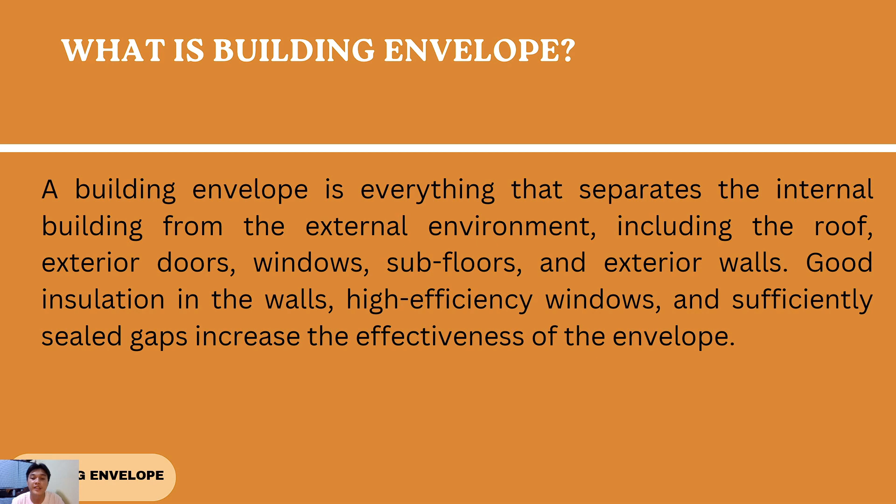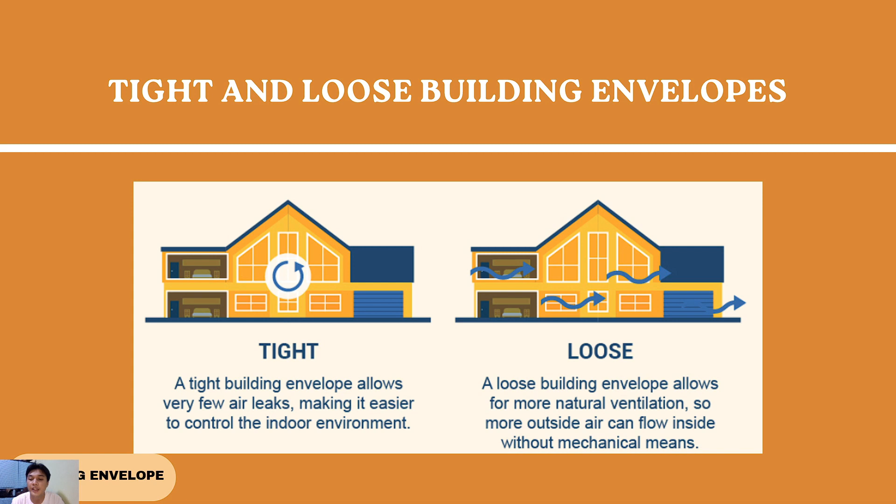Tight and loose building envelopes. So the first one is a tight building envelope. A tight building envelope allows very few air leaks, making it easier to control the indoor environment. A loose building envelope allows for more natural ventilation, so more outside air can flow inside without mechanical means.

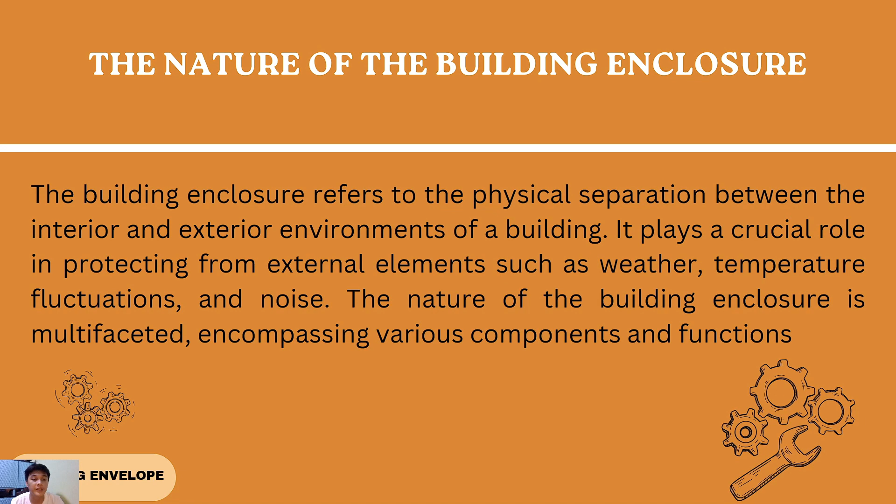The nature of building enclosure. The building enclosure refers to the physical separation between the interior and exterior environment of a building. It plays a crucial role in protecting from external elements such as weather, temperature fluctuation, and noise. The nature of the building enclosure is multifaceted, encompassing various components and functions.

A building in general consists of a collection of spaces bounded by a set of spatial separators. There are separators between interior environments as well as separators of the interior environment and the exterior environment. Collectively, the latter constitute the building enclosure. In many respects, the functions of the separators of internal environments within a building, floors and interior walls, are very similar to those of the building enclosure. Usually, however, the performance requirements of internal separators are fewer and much less onerous.

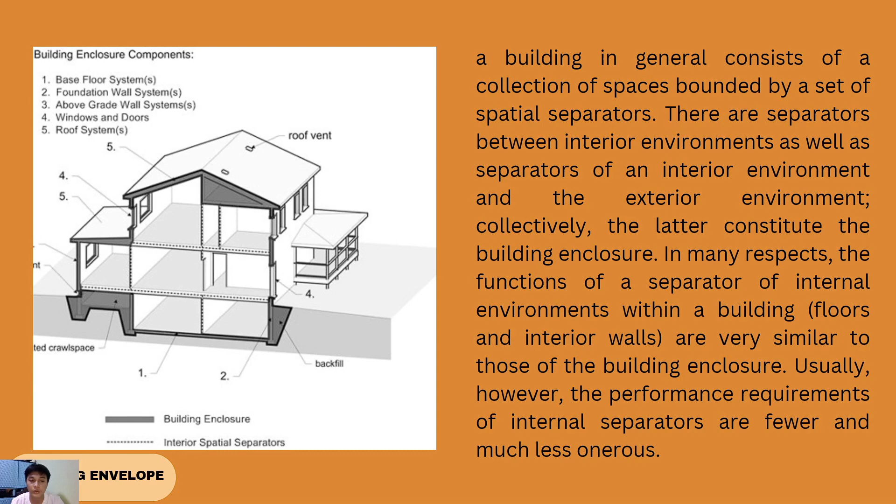Enclosure components. The building enclosure comprises various components that work together to create a barrier between the interior and exterior environments of the structure. These components typically include exterior cladding, structural frame, insulation, vapor barrier, air barrier, water barrier, roofing system, windows, doors, etc.

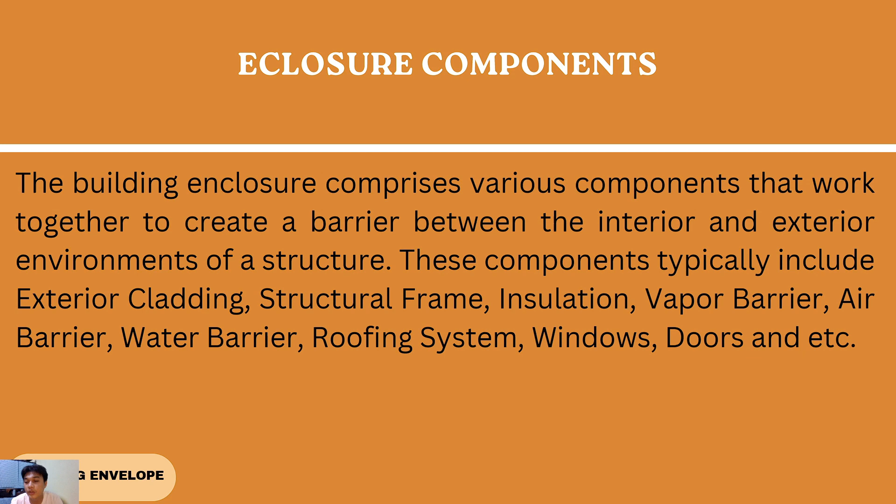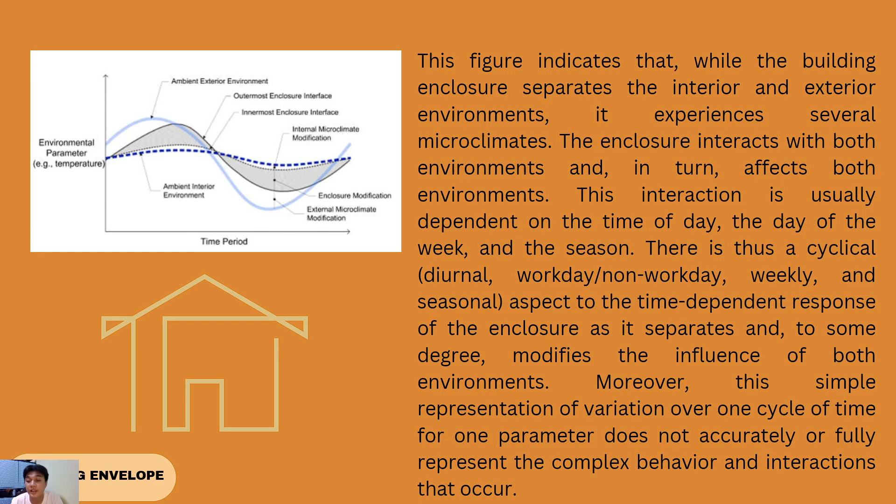There is thus a cyclical, diurnal, workday, non-workday, weekly, and seasonal aspect to the time-dependent response of the enclosure as it separates and to some degree modifies the influence of both environments. Moreover, this simple representation of variation over one cycle of time for one parameter does not accurately or fully represent the complex behavior and interaction that occur.

Enclosure loadings. The performance of any portion of the enclosure should be considered with regard to the various loadings generated by number 1, the exterior environment, number 2, the interior environment, and number 3, the enclosure itself. The generic term loading refers to any event, phenomenon, or characteristic that can affect the enclosure.

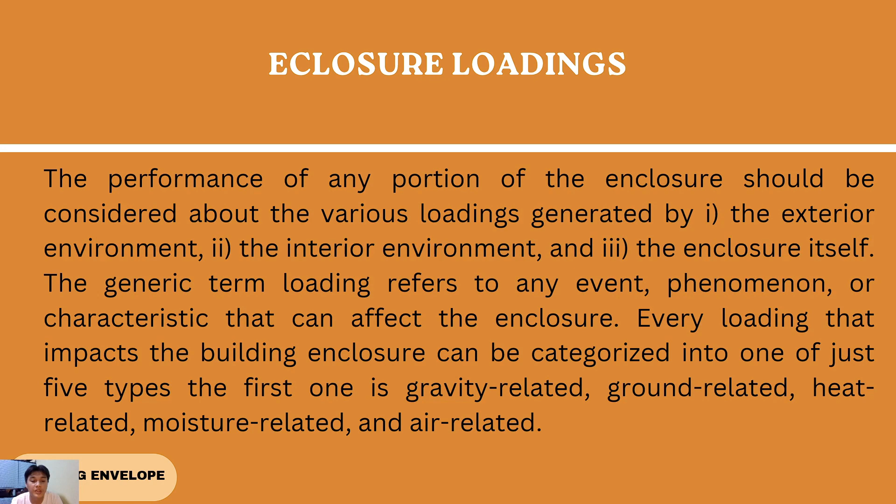Every loading that impacts the building enclosure can be categorized into one of just 5 types: gravity related, ground related, heat related, moisture related, and air related. Exterior environment loadings. The exterior environment described above is responsible for many different loadings. Sources of these loadings are the climate, weather over the short term, human or human-made effects, and nature or natural phenomena.

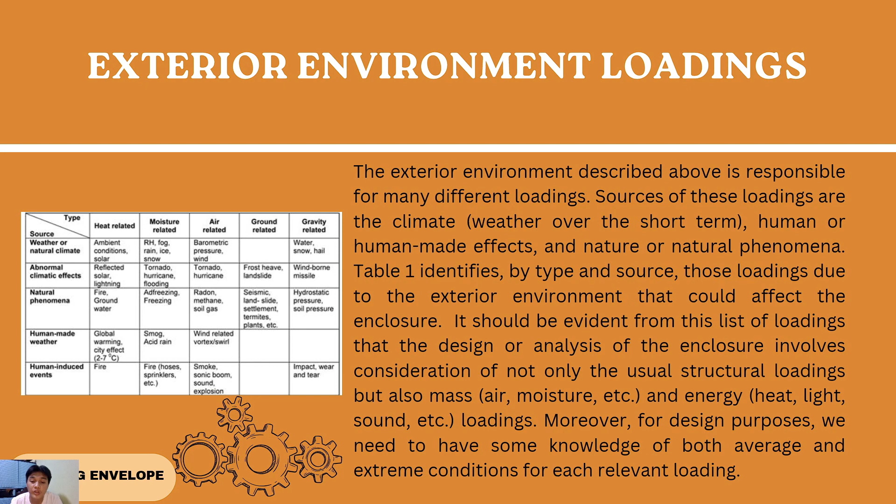Table 1 identifies by type and source those loadings due to the external environment that could affect the enclosure. It should be evident from this list of loadings that the design or analysis of the enclosure involves consideration of not only the usual structural loadings but also mass (air, moisture, etc.) and energy (heat, light, sound, etc.) loadings. Moreover, for design purposes, we need to have some knowledge of both average and extreme conditions for each relevant loading.

Interior environment loadings. The interior environment consists of occupied and often conditioned spaces. As shown in the table, the main sources of loading are human induced, the result of natural phenomena, or due to the conditioning. Variations in the state of the interior climate and the related extreme values tend to be smaller than those occurring within either the enclosure or the exterior.

This occurs not only because the building enclosure modifies the effect of exterior variations, but also because the interior environment is generally augmented by inputs of mass and energy. The building or parts of it may be mechanically conditioned.

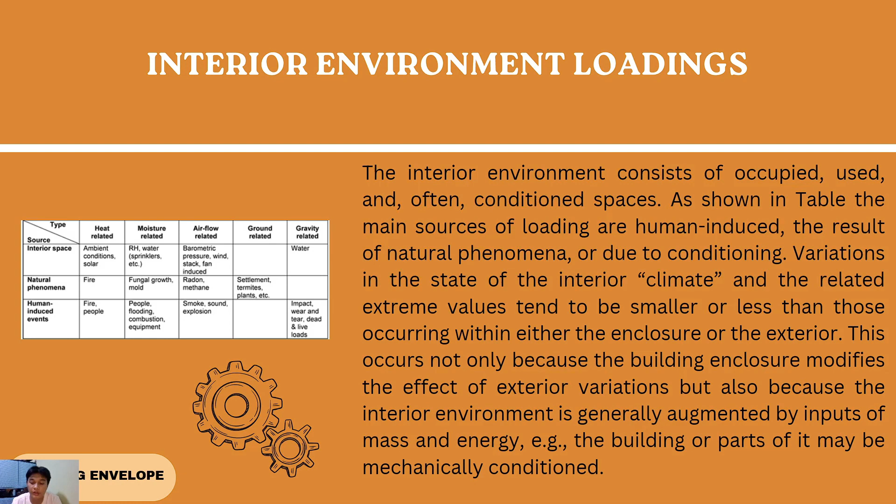Loading from the enclosure. The enclosure is only one part of the larger system that moderates or controls the environment on both sides, especially the inside, of the enclosure at some location on the building. The building itself and the enclosure both influence the exterior microclimate that interfaces with the exterior surface of the building enclosure at a specific location. Consider, for example, the local impact of wind, rain, and solar radiation.

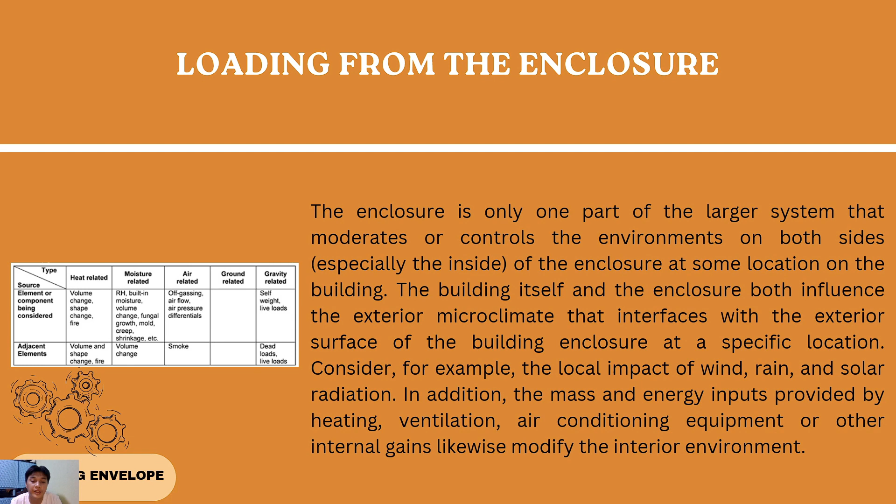In addition, the mass and energy inputs provided by heating, ventilation, air conditioning equipment, or other internal gains likewise modify the interior environment. The functions of the enclosure. In general, the physical function of separation of the building enclosure may be grouped into subcategories as follows. Support function: to support, resist, transfer, and otherwise accommodate all structural forms of loadings imposed by the interior and exterior environments, by the enclosure, and by the building itself.

Control function: to control, regulate, and moderate all loadings due to separation of the interior and exterior environments, largely the flow of mass (air, moisture, etc.) and energy (heat, sound, etc.).

Finish function: to finish the enclosure surface and the interfaces of the envelope with the interior and exterior environments. Each of the two interfaces must meet the relevant visual, aesthetic, wear and tear, and other performance requirements. Distribute function: to distribute services or utilities such as power, communication, water in its various forms, gas, and conditioned air to, from, and within the enclosure itself.

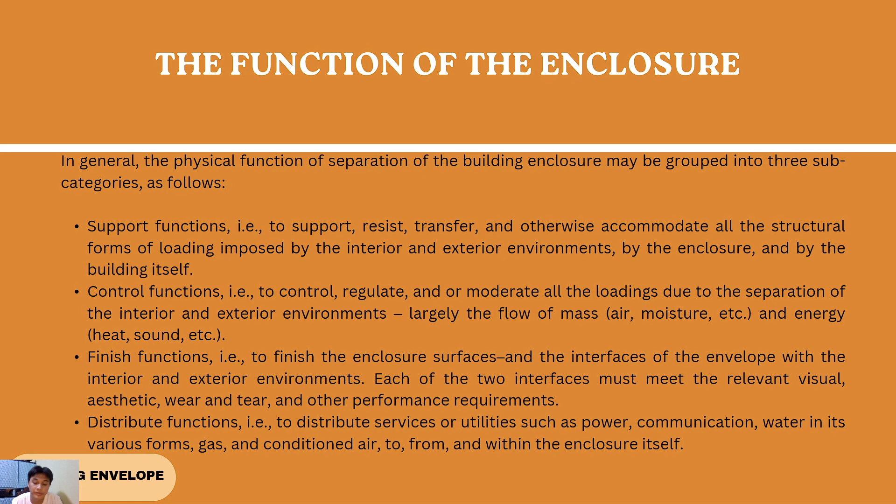Moreover, the distribution functions, which largely service the adjacent interior spaces, need to be met only where there is a service or utility to distribute. Largely, most enclosures do not need to fulfill this function.